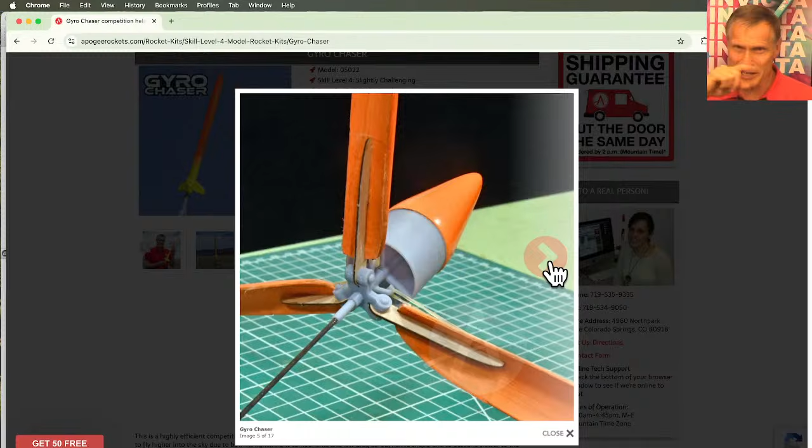Previously, this was laser cut, and it was pretty good. But the laser cutting, you know, you had separate hinge pins and everything had to be glued just perfect. This, there's just like 3 drops of glue on the pins to hold them in, and a drop of glue on the shaft right here where it meets this piece, and then once inside the nose cone. And it's all self-aligning. And yeah, it just goes together so fast.

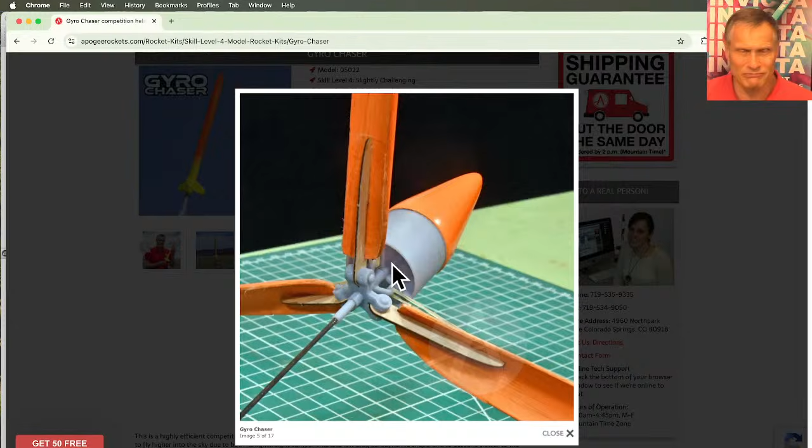And the rest of the rocket, you know, is great. And the blades, they curl up and they go inside the tube. And when it comes out, it just springs open. So I like this rocket because of the engineering involved. Well, I had to redesign this hub. It took me a while to get it right. And I just like, it's so simple. It's just so simple once you got it done.

Yeah, so that's kind of what it looks like. So this was released this week, I think it was, with the new hub. And there's the new hub and the pins that go with it. And it's all 3D printed. So the cool thing is, you know, we made the kit better, but we didn't have to increase the price at all. We were able to keep it the same price, which I was really happy about.

It still has some laser cut parts, but they're just the few parts. You know, you got your blades and your fins, and these are the hinge arms. And the hinge arms, they need to be strong because it takes a lot of force. So we kept them as plywood. But everything else, pretty easy peasy.

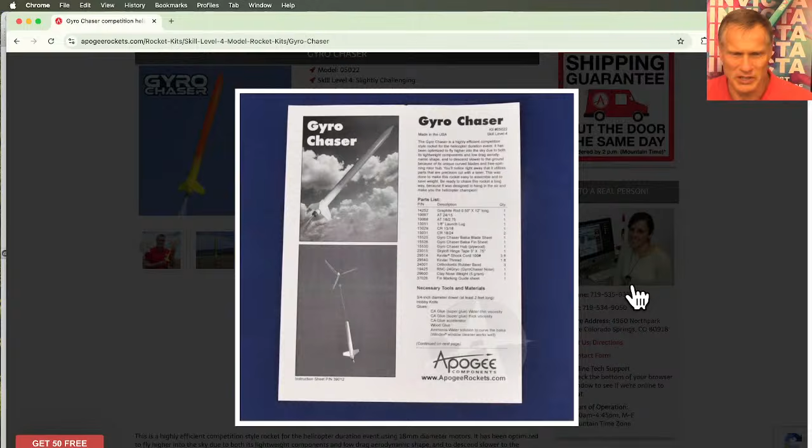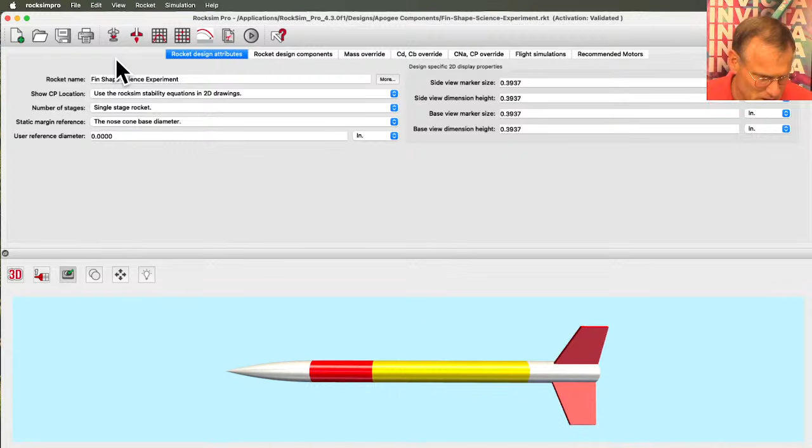Sturko3 says, on high-power rocket launch, say the Katana, do you favor the speed off the rail or a 5-to-1 thrust ratio, which RockSim gives both? Okay, so what he is talking about, this is a RockSim question. So let's open up the, what did he say, the Katana? Katana. Okay, so let's go file, open, and let's see if we've got a Katana here.

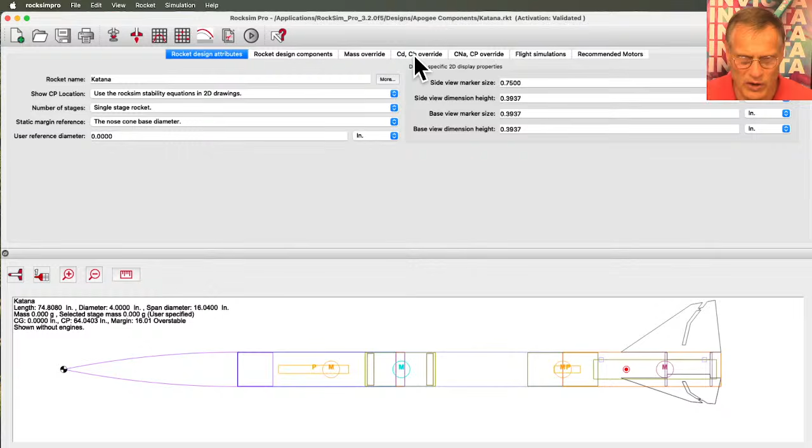Katana rocket. Okay, so here's the Katana. Oh, okay, so I'm noticing right now that the center of gravity is way up here. That kind of tells me something's weird. So that's the mass override. So it tells me that if I see the center of gravity up here, I always want to go to my mass override tab. And this is checked, so we're going to uncheck it. And now it moves back to where it should be.

Okay, so let's load a motor in this and run a simple simulation. Show only engines that match the motor mount diameter. I want to do a low thrust motor. Let's try Cesaroni. Let's see if there's something a little bit smaller. I want a J, Aerotech J135. And let's make it a 14-second delay. I always choose the longest delay to get started.

And let's see where we're launching from. Okay, so this is dual deployment. I assume this is the drogue because that's a pretty big chute. So we'll deploy this one at apogee and then this one at an altitude, and we'll say the altitude is 500 feet. Starting state. Oh, we've got to make this an 8-foot long launch rod. Oops. And it's launching straight up.

Launch conditions. We're at a pretty low altitude. I'm not sure where this is. We'll find out here in just a second. Okay, so it ran the simulation. So his question is about liftoff speed off the rail or a 5-to-1 thrust ratio.

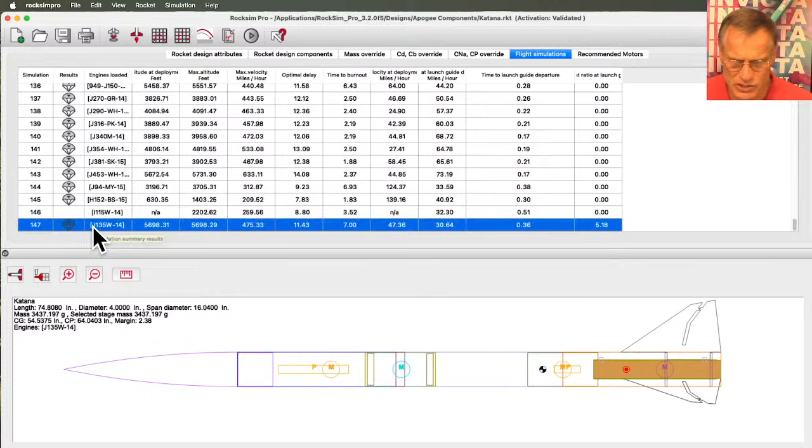And the other thing that he mentions is the thrust to weight ratio. Right now it's not showing that, but if you right click on the column header and then come down here to organize columns, you can find the thrust to weight ratio at launch guide departure. So we'll click OK and then find that last one that we just did. Yeah, so this one right here. This is the thrust to weight ratio at launch guide departure.

Let me move this column right there. To move columns around, you just click and drag the column header. I just wanted both of them right next to each other. So this is the one that we're comparing. So his question is, which one do I prefer? Velocity at launch guide departure or thrust to weight ratio?

Personally, I like to look at this one right here, and this is my preference. I know there's a lot of RSOs out there that look at the thrust to weight ratio, but the thrust to weight ratio that they look at is not at launch guide departure. They just look at the maximum thrust to weight ratio, which may or may not occur when the rocket leaves the rail. I like to know what the speed is when the rocket's leaving the rail, because it can be deceiving.

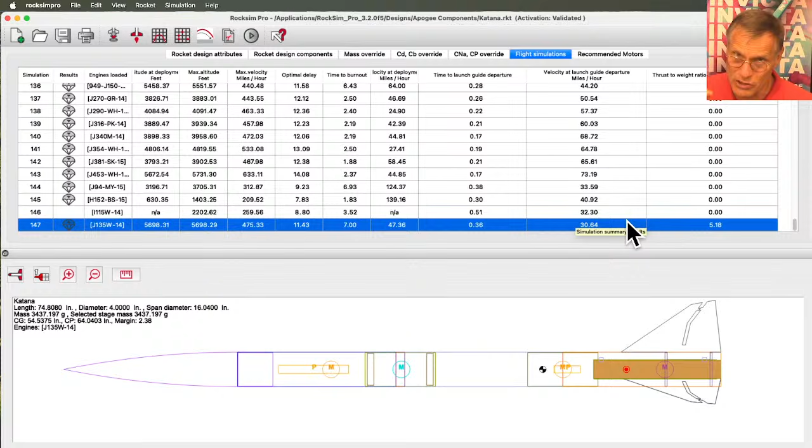And that's why we choose to display the thrust to weight ratio at launch guide departure, because once it leaves the pad, that is typically the slowest that the rocket is that's unguided. And so I like to use this number, but I know a lot of people like to use this, but this number is important when it leaves the pad.

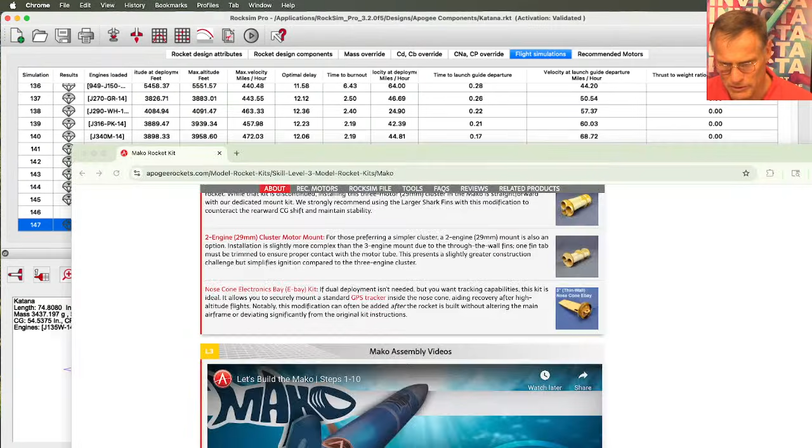Gino 145 says, standard dual deploy or head end, advantages and disadvantages in RockSim, just the parts where they go. Okay, so head end dual deployment, like this Mako.

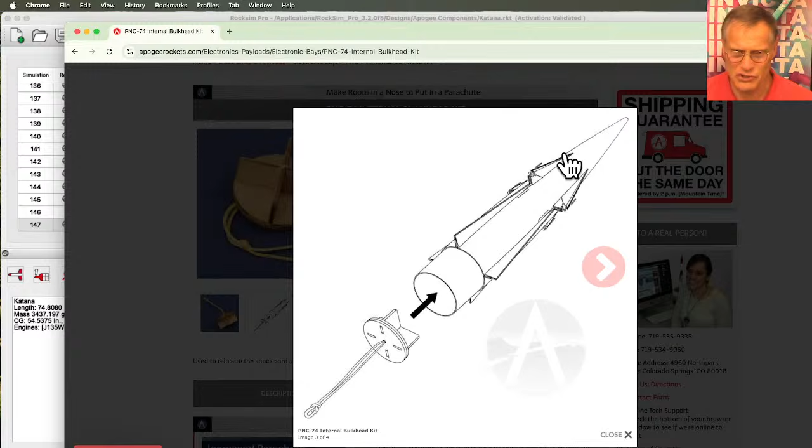Okay, so we created this shock cord anchor. It goes inside a 3-inch nose cone. Let me click on it and see if I got a picture of it. Here's a sketch of a 3-inch nose cone. This is actually the Nike Hercules, and we use this bulkhead inside the Nike Hercules because it's positioned way up here at the front. And what that allows you to do is to put a parachute inside the back end of the nose cone. And that is typically how head end dual deployment works.

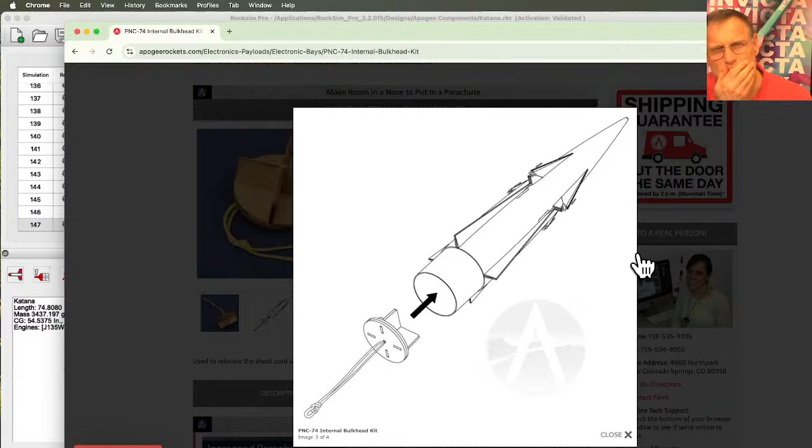What was it that I was doing where I was doing head end dual deployment? Let's see if I got an article about it. How to and guides. We want to go to Peak of Flight newsletter, all newsletters. Maybe I did a video. Head end. Nope, that's not what I wanted. I wanted to do a find on this page. Head end.

And I don't see it on that page, so maybe it was a video. Advanced construction videos, all videos. Do a find. Head end. Okay, head-end dual deployment. What is it and how can you use it? So let me click on this video. And I don't want to play the video. So this is video number 437.

So if you go to how-to and guides, advanced construction videos, and then you go to all videos, you click over here, and it takes you to this page right here. And then you want to scroll down. You see the numbers right here. Scroll down to 437. And then when you click on that, it'll take you to the video.

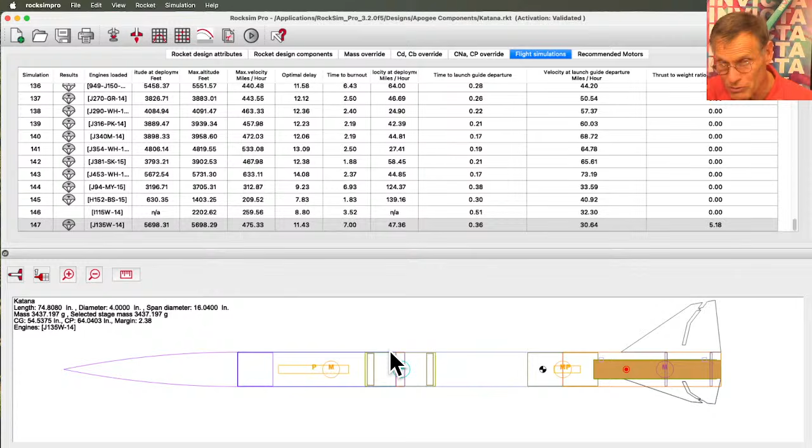If your rocket's long, like the Mako, see on this rocket right here, we can put the eBay right here, but we have the typical shoulder up here. This tube right here is not long enough. Typically the shoulder is 1 body tube diameter. So on the Mako, the body tube diameter is 3 inches, so the shoulder there is 3 inches, and the shoulder on the eBay is typically also roughly 1 body tube diameter, because that keeps it from rattling back and forth. It's long enough that it keeps it concentric.

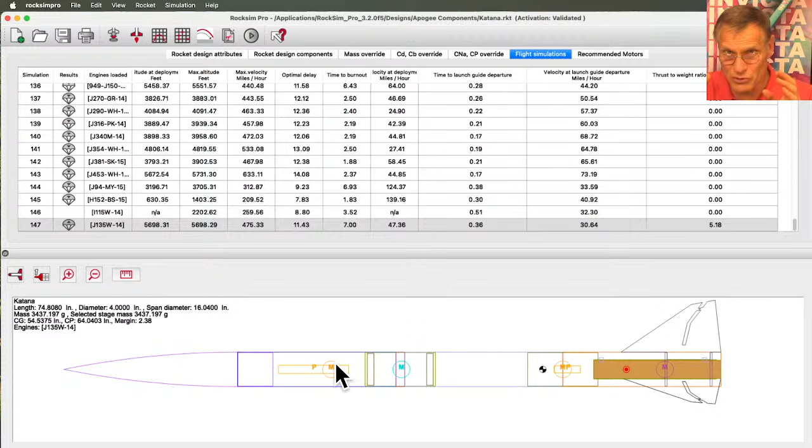But the tube there is I think like a 6 or 7 inch tube, so there's not room enough for a parachute. So if you cut the back end of the nose cone off, you can just shove that parachute up in there, and you know, that's an easy modification.

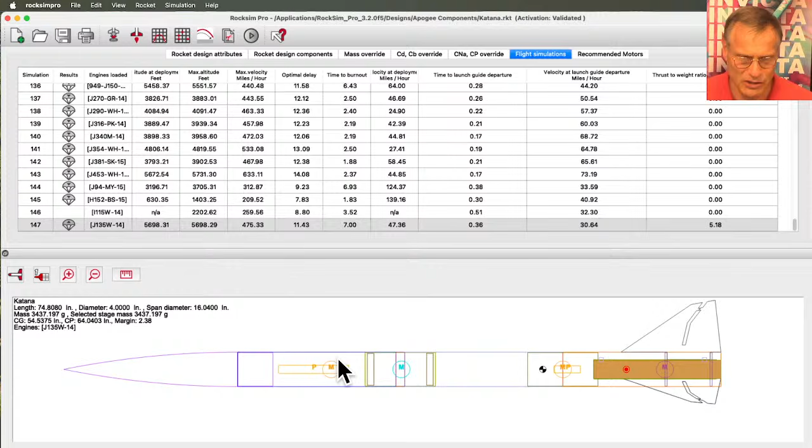So in RockSim, how do you do this? Let me take this kit right here. Okay, so we're going to go to the rocket design components. So here's our 48-inch parachute, and I'm going to move it to a new location. I'm going to put it inside the nose cone.

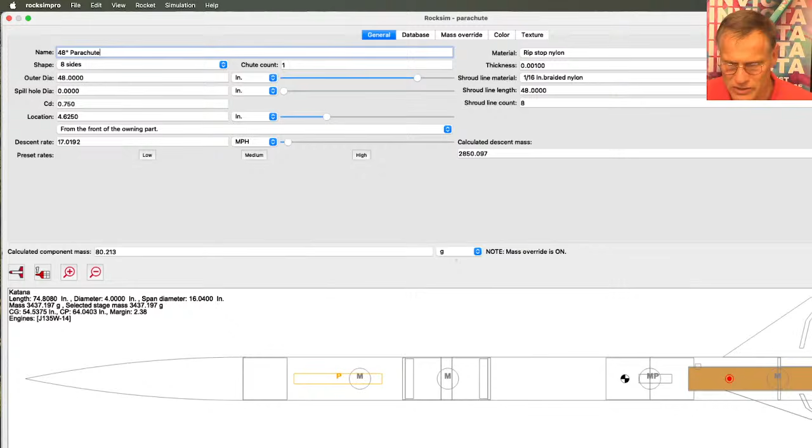So actually, crap, I'm going to have to delete it and add it back because I want to get rid of this tube right there. So I'm going to delete that whole tube, and when I get rid of the tube, it's also going to get rid of everything on the inside. So really delete this component, and I'm going to say yes. So now I got a short rocket.

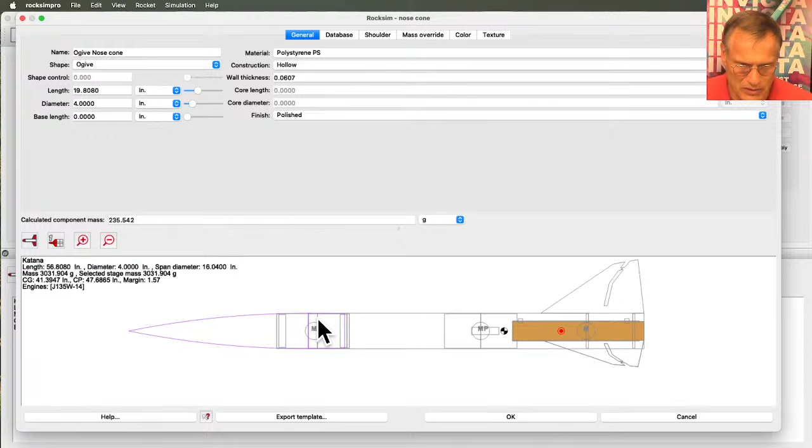And there's my eBay. It moved forward. The problem is it's not quite forward enough. So I'm going to first go to my nose cone here, and it's not a good color where you can see it. So let's make this color darker.

Make it reddish. And you still can't see it. But what I wanted to show you was the shoulder right back here. We're going to cut that off, and we're going to use the coupler on the eBay as the shoulder. So I'm going to go to my shoulder settings and clear the shoulder values. And when I did that, it went away. So now we just have the ogive side of the nose cone, and it stops right there. And the shoulder fits inside.

Let me go back to the nose cone here, and let me make it 3D. And let me go to the color, and I'm going to go to the opacity, and I'm going to turn down the opacity. So now we can see inside that nose cone. And this blue part right here is the shoulder on the eBay.

So now I'm going to go to that eBay. That's the wrong tube coupler. That's the wrong one. Where is it? eBay coupler. There it is. I'm going to open that. Let me change the color. It was blue. I'm going to turn it to red because all of our couplers are red except for the 4-inch one, which is brown. I'll leave it that. Okay, so I changed it to red.

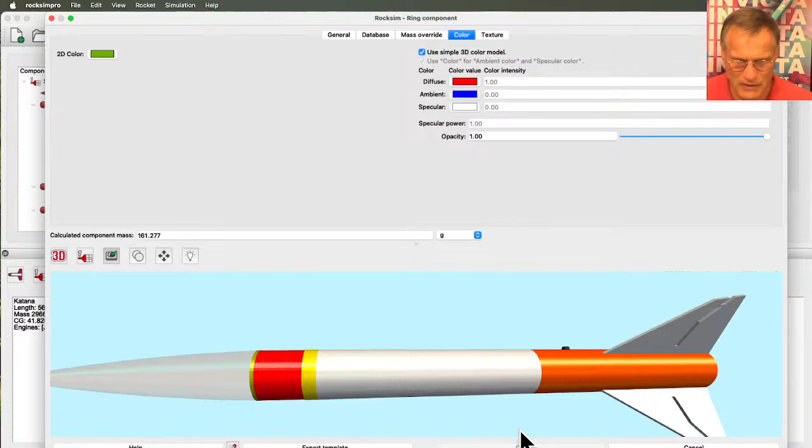This is a switch band, so this tube right there, let's make it shorter. So it's no longer going to be an 18-inch. Let's make it a 9-inch tube. And so now we got to change the name to a 9-inch tube. And let's make also this one translucent. Okay, so now we can see inside the rocket. You can see I'm switching back and forth between 3D and 2D.

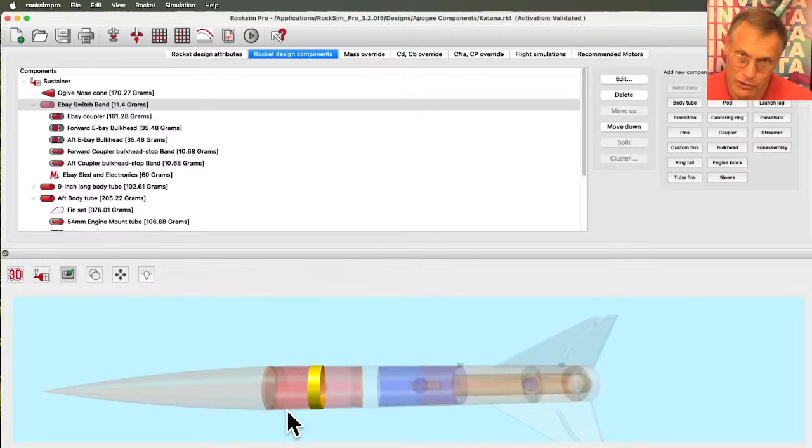Okay, so I made the nose cone transparent. I made this short body tube, which is right here, also transparent. This is another tube coupler. So I've got a switch band, I've got the coupler here, and then the base of the nose cone. And you can see they just line up. So the coupler is now the shoulder of the nose cone. It kind of does dual purpose there. Okay, so now let me go back to 2D.

So we have one parachute back here, this orange, let's see, can I get right there? That's the small parachute. And let me open it up and say it's an 18-inch drogue parachute. 18-inch drogue parachute. And the color is orange. Aren't you glad I didn't say red? So now this mass object right here is the eBay sled and the electronics.

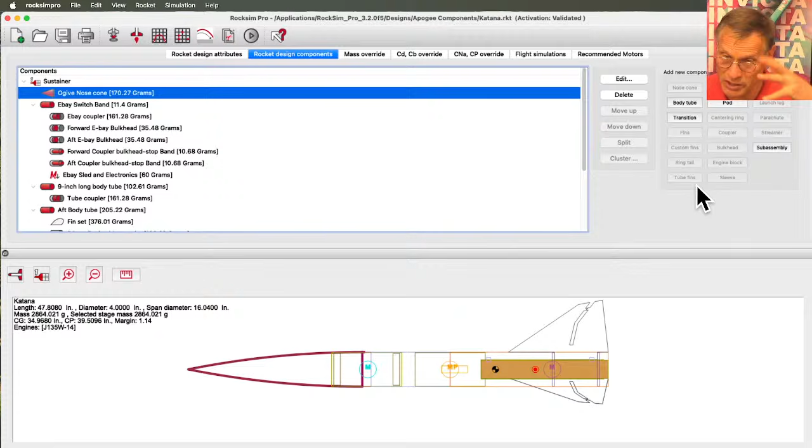So now I need a parachute up in the nose cone. So, oops. So if you click on the nose cone, you'll see that I can't add a parachute there. So this is the trick that you're going to have to do here. The next component down is the switch band. And normally you wouldn't put a parachute in there, but I'm going to put a parachute in there because it will let me. So my parachute button is right here, so I'm going to click on that. And this time I want that 48-inch nylon parachute. And you can see it added it right there.

Let me go back to 2D. It's pretty big right there. If I make the thickness a little bit smaller, 0.9. Typically that makes it smaller. There we go. I didn't make it small enough. 0.3. Okay, so here's the parachute. And now I'm going to change the position of that parachute. I'm just going to slide it.

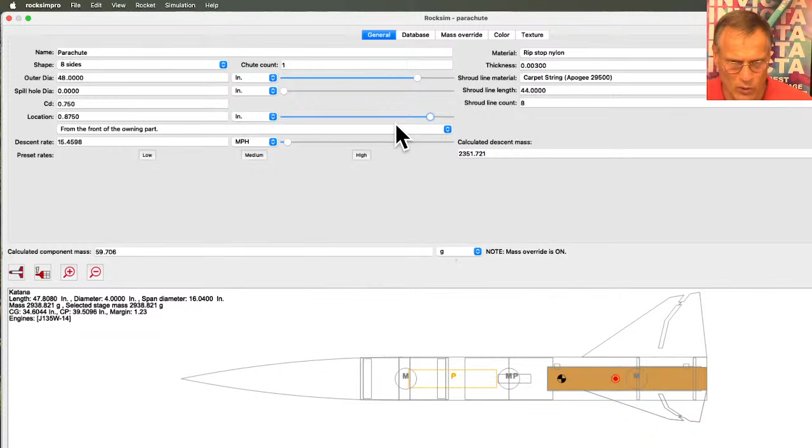See, it's only letting me slide it backwards because right now I'm putting it into this component right there where my cursor is. And it won't allow me to use the slider bar. But the other trick is I can put in any number right here in the location that I want. So let me put in a negative 10 inches and then hit the tab key and you'll see that it slid forward. And we're not quite forward enough. So let's make it minus 15 inches. And that's kind of too far, so maybe 14. Okay, so now we put the parachute up there.

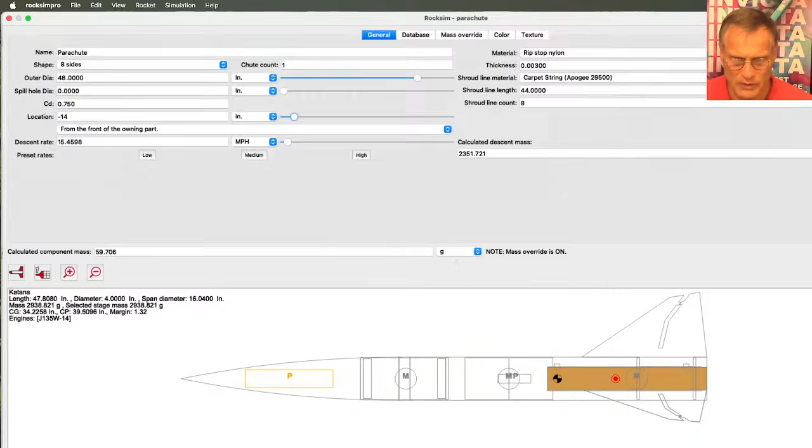We also need to put a shock cord in there. And a shock cord is a mass object. See, there's no button that says shock cord. So for a shock cord, you use a mass object. And you can put a mass object inside of a nose cone. So I don't have to do that same trick. So I'm going to cancel out of the database.

I'm going to call this a shock cord. And I'm going to change the classification to shock cord. And I select my material. I'm looking for tubular Kevlar. That will work. That's 3/8. That's a little skinny. Do I got a 1/2 inch? There we go. Oops.

1/2 inch tubular Kevlar. That will work. And then the length, typically when you put a shock cord in a rocket, this is dual deployment, you're going to have 2 lengths, a short one and a long one. You always want to do the long one for the parachute that opens first, because at that point the rocket's going to be moving fast. Once the small parachute is out, now the rocket's moving slow and you don't need a big long one, so you can use a short one. So I'm going to make this one 10 feet.

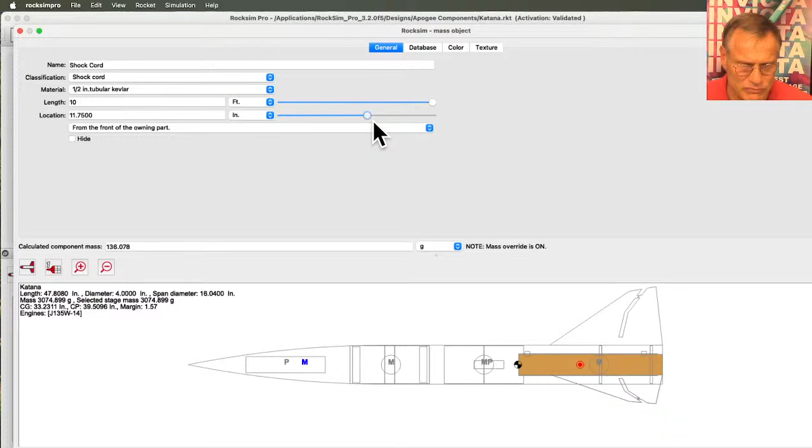And so right now it's putting it right there, and I'm going to move the location to here. So this is my bulkhead on the coupler, and then this is an inside tube that keeps that bulkhead from going inside. This is typical of the Apogee 4-inch diameter eBay kit. And I'll say okay. Okay, so basically now we have head-end dual deployment setup. We have a parachute up in the nose cone and a parachute in the back.

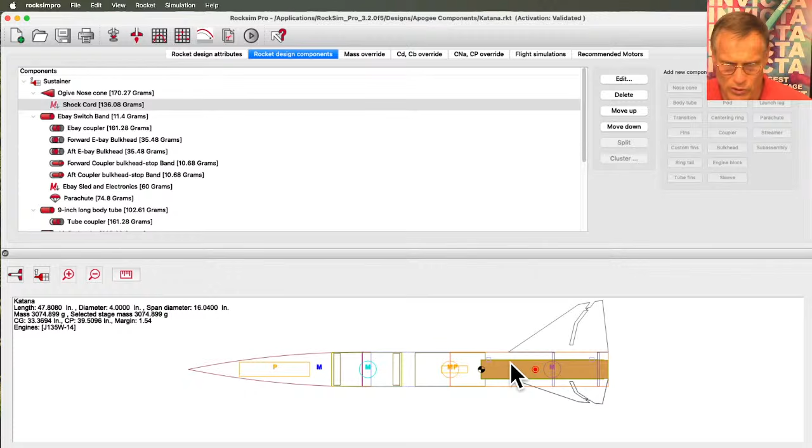My rocket is still stable. Here's my center of gravity. Here's the center of pressure, even with this big J motor installed. And there looks to be enough room in front of the engine for the parachute. And then here is the back of the eBay. So now it's just a matter of doing dual deployment.

So flight events, again, we have our 18-inch drogue parachute set at Apogee, and then this one was a 48-inch, and we're going to set that one to an altitude of 500 feet. And starting state, still 96 inches. Everything stays the same. We've got wind coming from the west at 8 miles an hour. And I'll hit the flight profile, and we'll just take a look at this launch.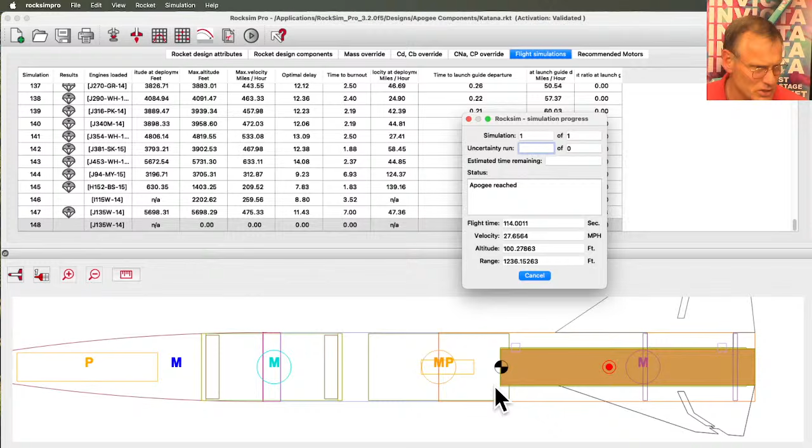Okay. So remember, I left my rocket being translucent, so you're seeing all the stuff on the inside here. So it's kind of weird. Where am I launching from? I have no idea where I am. This right here is a compass, so I'm going to swing it around so that the black arrow points up. And I'm just trying to figure out what part of the... Okay, so here's Chicago. So it looks like I'm somewhere in Iowa.

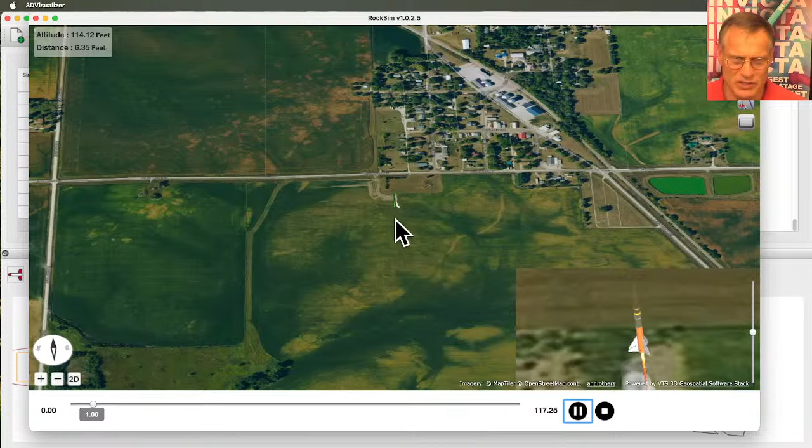And when you lose your launch pad, just click the home button, it'll take you right back to where we were. I zoomed in too close though. I want to see a trajectory view. Swing the north around again. Okay, so my rocket is right there at the tip of my arrow. And when we launch it, you can see the rocket taking off. It's going high. I need to zoom out.

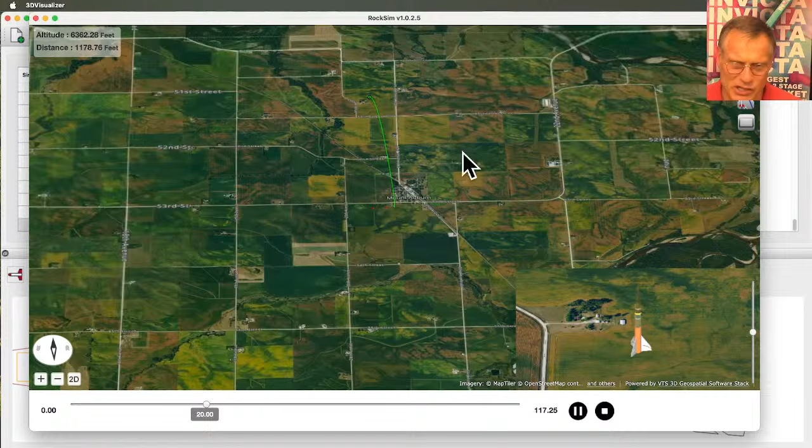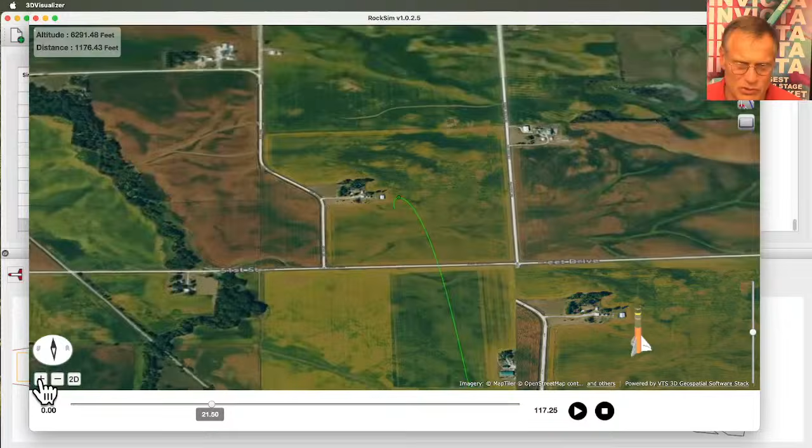We're at 4,000 feet, 4,500, 5,000 feet. We're slowing down. We're going to probably make 6,000 feet. 63. It's getting really close to Apogee. There's Apogee. So at Apogee, the parachute came out. So let's stop it right there and zoom in. Find the rocket, clicking that button right there. Zoom in, zoom in, zoom in. Okay, so there is our small drogue parachute.

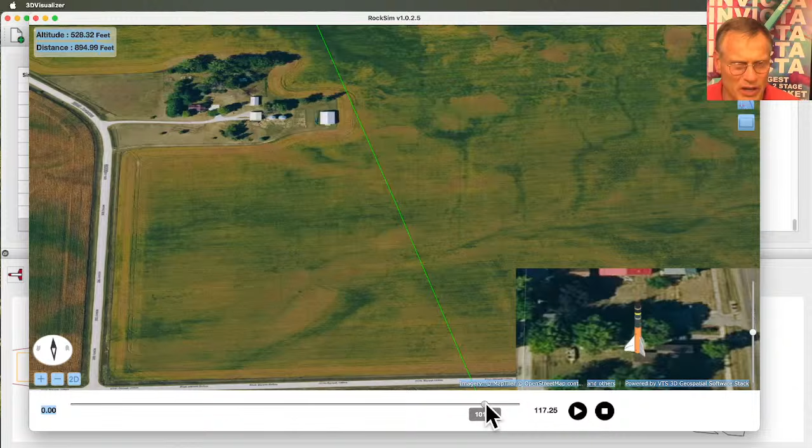And then when it gets down to 500 feet, the parachute should change. Oops. Find the rocket. I'm just going to move things along to where we get close to 500 feet. So I'm looking up in the top left corner to my altitude. Okay, so here's 528. Find the rocket. Okay, so there's the rocket.

And if we go one step further, 499, and oops, I lost the rocket again. And now we have a bigger parachute. So right here is when the big parachute came out. I can tell that because the trajectory line changed. So that is the question on head-end dual deployment.

We have Dr. Disco says, may have missed this somewhere, so excuse me if this has been discussed previously. Is there a way to account for a spill hole in a parachute? Okay, so that's a good question. So let's go back to our rocket design components, and let's find that big parachute. So to find it, you highlight it here, and then it will get selected up here. We can open it. And I'm going to change the name to the 48-inch parachute so I know the difference.

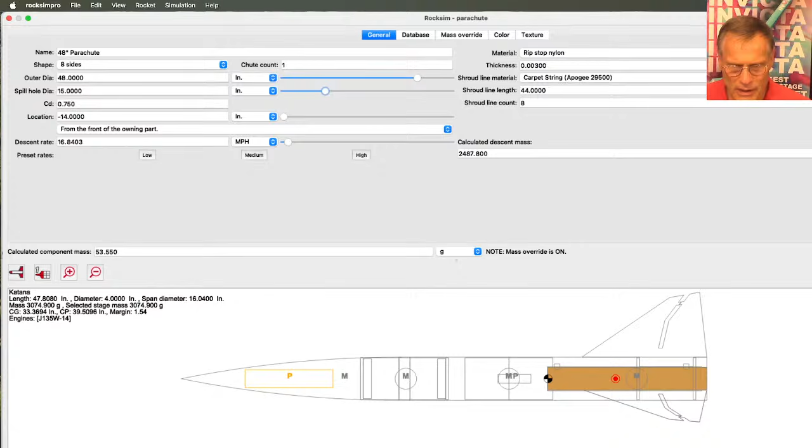So here in RockSim, if you go down 2 rows, you have a spill hole diameter. So let's put in a 15-inch spill hole, and then hit the tab key. And so now the parachute has a spill hole in it. And we click OK. And let's run another simulation. Same thing, we're going to be still launching from Iowa.

We have 2 different flights here. So this is the last one we ran, and this is the new one. And I want to compare these, so you select both of them, and then come up here to the launch visualizer button. Oh, it always does that when I go up into that corner.

Okay, so there's the rocket on the pad. I'm going to launch it, and there's actually 2 rockets here. They follow identical paths. So now they're starting to deviate, and they're not deviating too much. So why are they deviating?

The reason is when you cut a spill hole in it, the weight has changed. And so this one right here is probably the one with the spill hole. But right now, these are the drogue parachutes. We didn't cut a spill hole in the drogue, just the main parachute. So until we get down to 500 feet, we're not going to see much difference. And they seem to be falling pretty close.

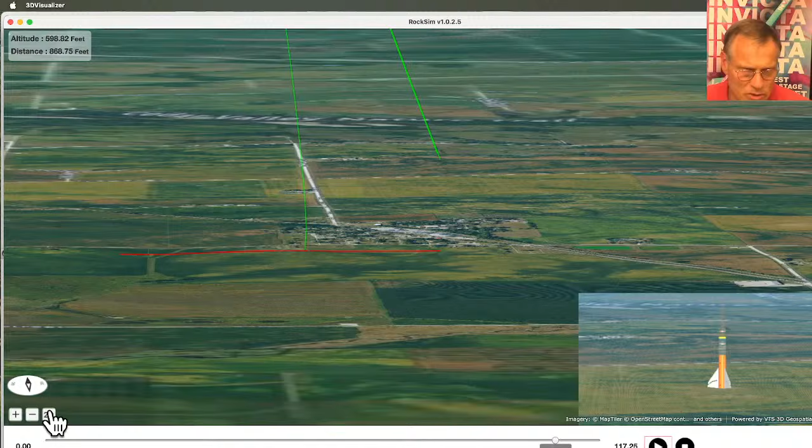Okay, so now you'll see that, let's see if I can rotate this around. And let me zoom out, see if we can see a difference. Okay, so now we can see the dog leg. And if we back it up, oh, come on. And I want to zoom in. I still want to see the rockets. Okay, so there's the rockets coming down.

So we think that this one right here is the one with the spill hole. So once the main parachute opens up, this one's going to fall faster because it does have that spill hole in it. So does it overtake it and actually land first? It's really hard to see. I can't tell. Yeah, I think that's the one with the spill hole. Because it did come down a little bit faster, it landed a little bit shorter.

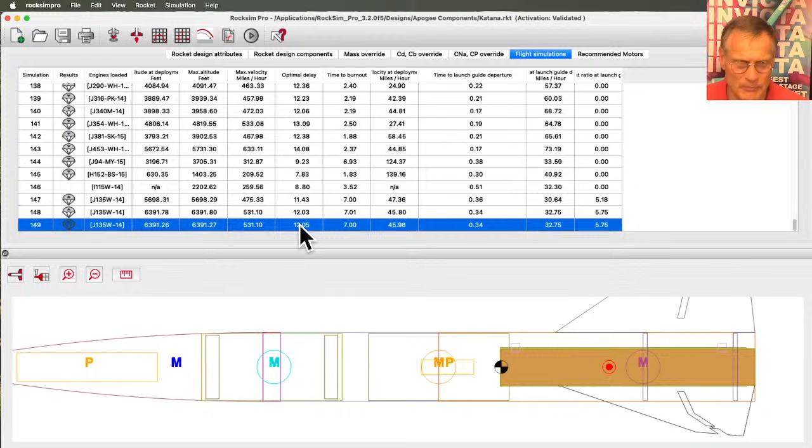Let's see if we can find the velocity at touchdown. So I double clicked on the row, and what I'm looking for is recovery system data. Okay, so here is the velocity at landing, and in the Y direction, which is the coming down side, is at 15.52 miles per hour.

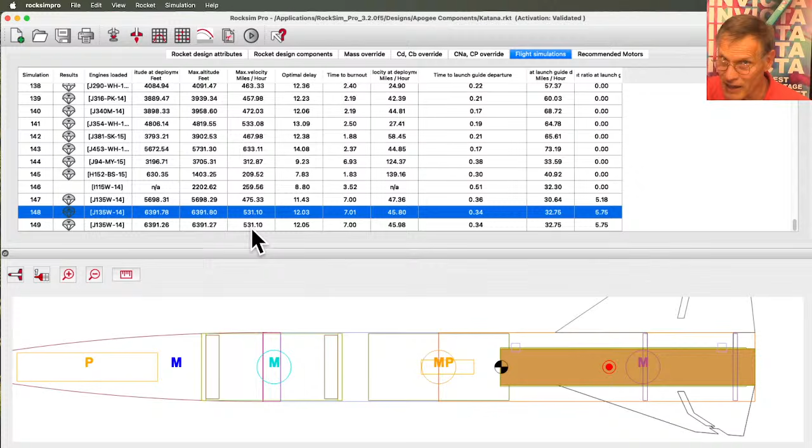If I go to this one, it was at 14.97 miles per hour. So that one is slower because it's a lower descent speed. So that tells me that the bottom one had that spill hole, and it did land at a higher speed because of that spill hole in there. Pretty good question.

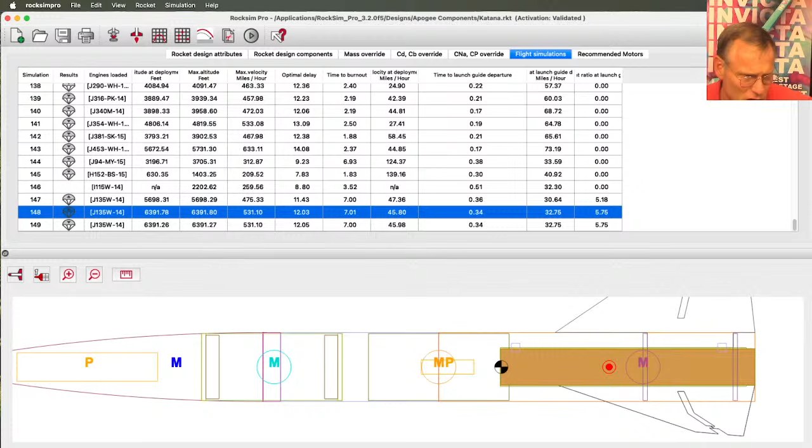Okay, Goldspot 804 says, I'm trying to run a simulation on the tuner rocket that's in the free plans book, but it doesn't allow me to choose a recommended engine. Is it because it is a two-stage or something else? And the answer is yes. It's because it's a two-stage. Let me open, I don't think I have that one in here, but let me find a different rocket that's a two-stage. I'm just trying to remember which one's two-stage.

How come I'm not seeing all my rockets? Blue Streak, Rotary Revolution, Slow-Mo, Texas Twister, Apprentice, Frit. Is the Frit a two-stage rocket? Save my changes to that? No. No, the Frit is not a two-stage rocket. Initial Katana, Maker's Dungeon, Midge, Mini Condor, Peregrine, Research, Express, Spek. Okay, here's a two-stage rocket.

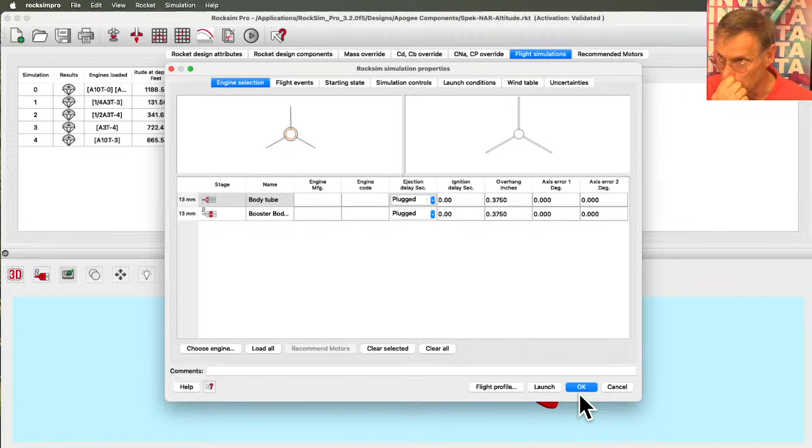So normally, to find the recommended motors, you just click up here, go prepare for launch, and the button right here is recommended motors, but you see it's grayed out. I can't select the motors for this. So what do you do? That's your question, right? How do you pick motors? You got to do it in two stages. You got to pick the motor for the booster stage by itself, and then pick the motor for the upper stage by itself. So how do you do that?

Okay, so we're going to go to the rocket design attributes. Right now it says 2-stage, and we need to switch that to 1-stage. But when we switch it to 1-stage, it's going to delete all the parts in the booster stage. So I need to take all those parts in the booster stage and move them to the upper stage. So we're going to go to the Rocket Design components, select the booster tube right there, and copy it. I right click, copy, then come up to the last component here and hit paste.

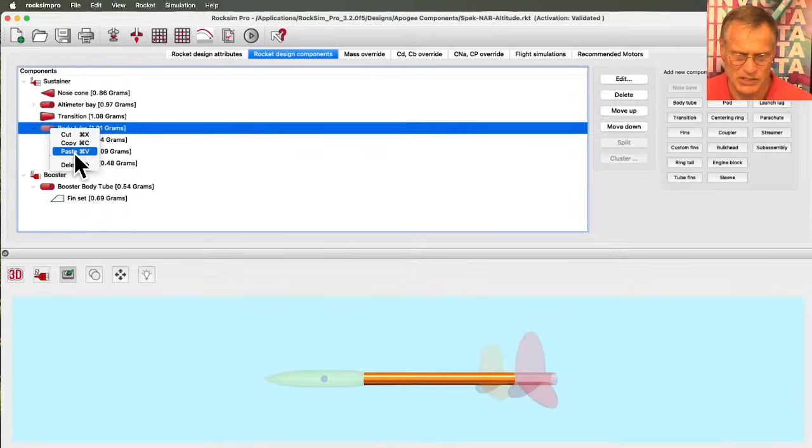So again, right click, then paste, and you'll notice that it put another booster stage right here in the middle. But this booster stage is actually connected to the top stage. And this one down here is the other booster stage. So now I can come back over here to the Rocket Design attributes and change this to a single stage rocket. It's going to ask, do I want to do this? I'm going to say yes. So even though it looks like a 2-stage rocket, it's going to behave like a single stage rocket because all the components are in the upper stage.

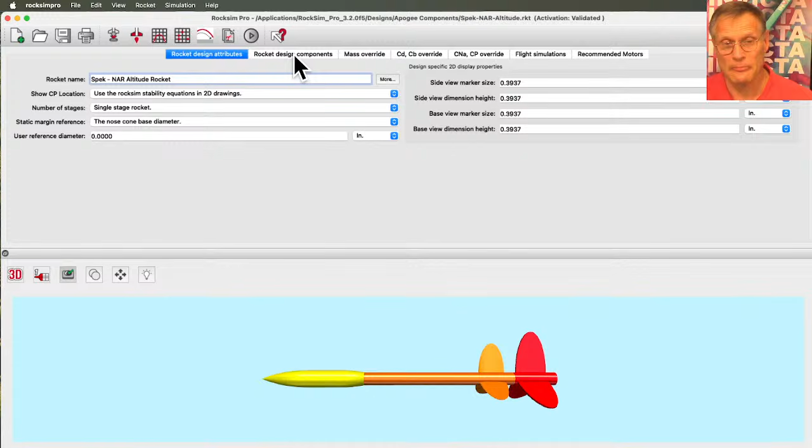Now to fly this and to determine what motors, first we need to have a motor in the upper stage because that motor has weight and we're lifting it at the same time.

So we need to know what the weight of a typical motor is. And I would suggest using the heaviest motor that you realistically are going to put in there. So if we go to prepare for flight, it's showing 2 motors right here, 2 motor tubes. And this is the bottom one, this is the top one.

And if I double click here, I'm going to put in the biggest motor out of this list, and I can tell that this is the biggest motor. Well, the A3, I don't know which weighs the most, but this one has the most impulse. So I'll select that one and click OK. Actually, okay, so what I wanted to know was the mass of that motor.

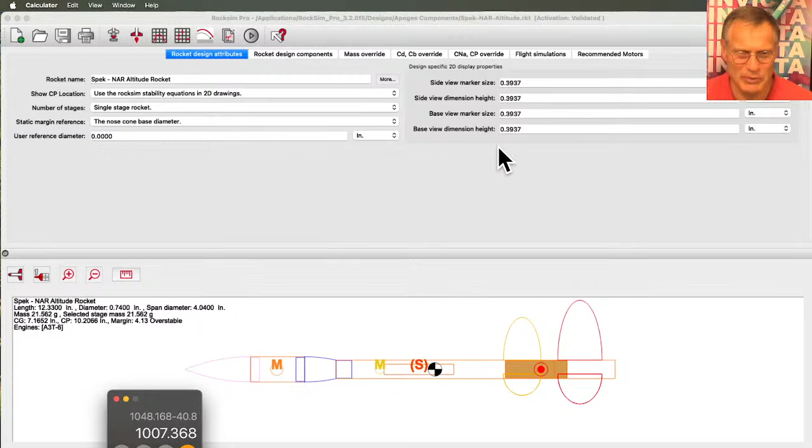So the mass right now, I'm going to get a calculator here. Where's my calculator? Calculator app. Not the calendar app, I want the calculator app. CALC, calculator app. Okay, so I'm going to take this number right here, 21.562.

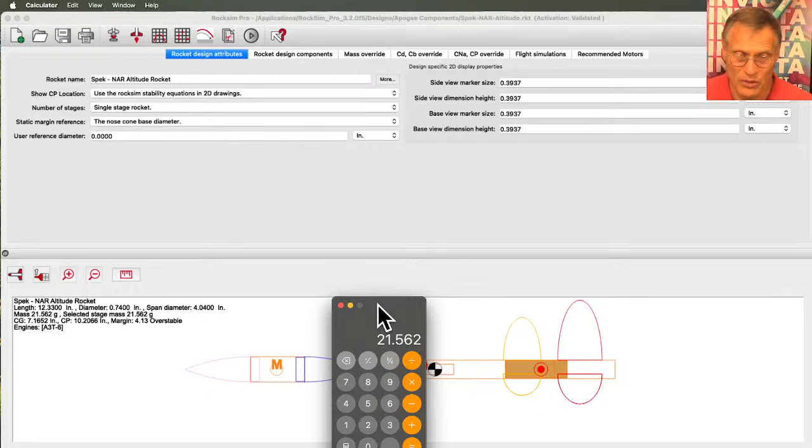21.562. Basically, I'm just trying to find out the weight of the motor. So I got the weight of the whole rocket with the motor, and then I'm going to take the motor out, and the difference should be the new weight. Let's see, can we see this on the screen? I'm trying to move this over to get the calculator over here. Okay, so now I got this.

I'm going to go back up here to the motor, and I'm going to clear all. Click OK. And now my mass is 13.062. So now I'm going to subtract 13.062 equals. So this is 8.5 grams is the mass of that motor.

So I need to put 8.5 grams back here, and the easiest way to do that is to use a mass object. So I'm going to select that body tube, come up here to mass object, and I'm going to call this the fake motor. Why won't it let me click up here? That's weird. Won't let me click anywhere. Oh, it's looking in the database. Cancel out of that. Now I can do this.

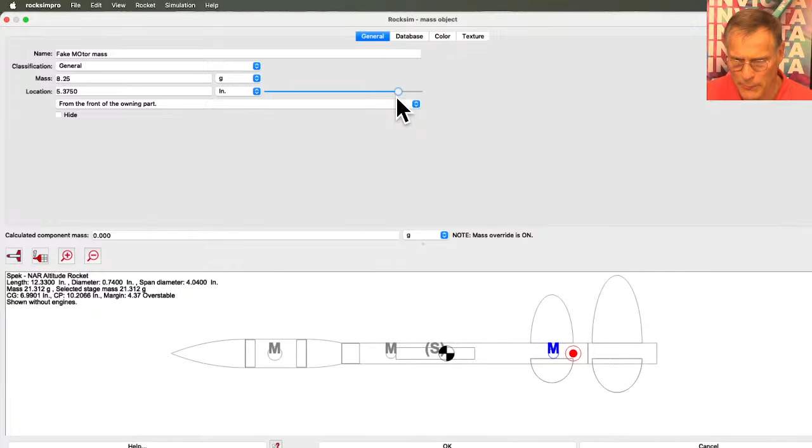Fake motor mass. And I know the mass is 8.5 grams. And right now I put it right there. We need to move it back here. Approximately right there. Okay, so that accounts for the weight of that motor. Okay, so now we can run a simulation and we can find the recommended motors.

So then you come back up here and, oh, the other thing that we needed to do is to turn this one off. You can't have more than one motor mount. So you got to uncheck that. So basically I take that tube and I say it's no longer a motor mount, and click OK. And now, hopefully, there it is. Now the recommended motor shows up.

And now I just click on that, say use the recommended conditions, and when it's done, it comes over here to the recommended motors tab, and it shows me the 4 motors that it ran. 3 of them are recommended. But this is a single stage rocket. So as a single stage rocket, this one right here, the A3, is going to get me the highest altitude.

So what I want to do, you can only do this in RockSim Pro. Everything I did up to this point you can do in RockSim and in RockSim Pro. But now when I'm in RockSim Pro, which is up here, I have some options. And one of the options is, now I want to figure out how high this rocket's going to go approximately when I'm selecting the motor for the upper stage.

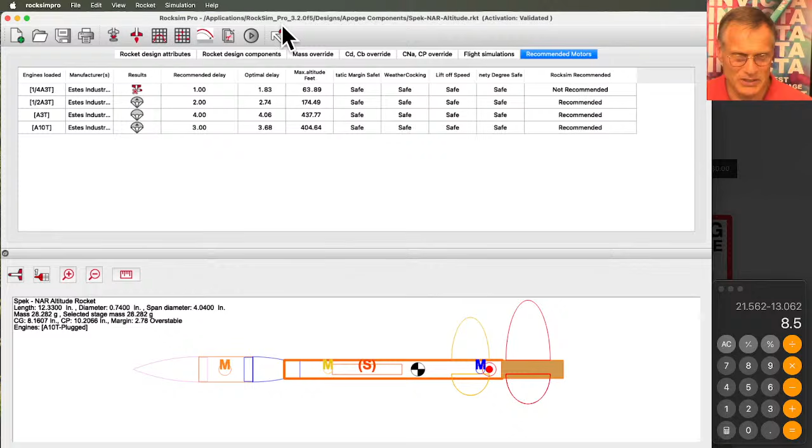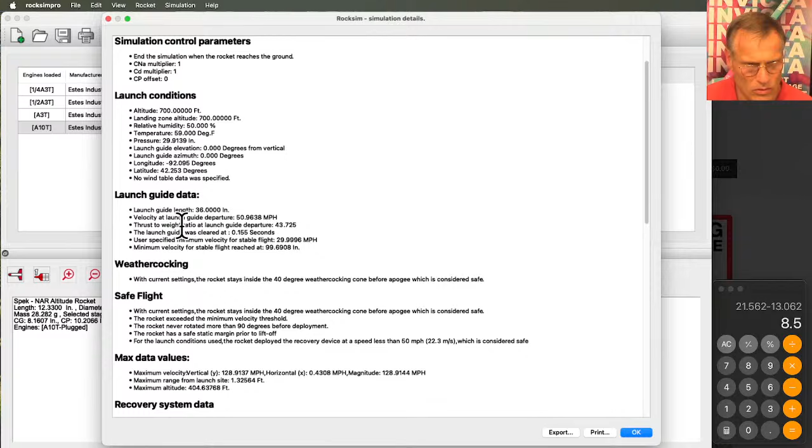So I need to make a screenshot. Let me see here. See if this has the information that I'm looking at. What I'm looking for is altitude at burnout. Let's see. I don't have an altitude at burnout, but I can get it.

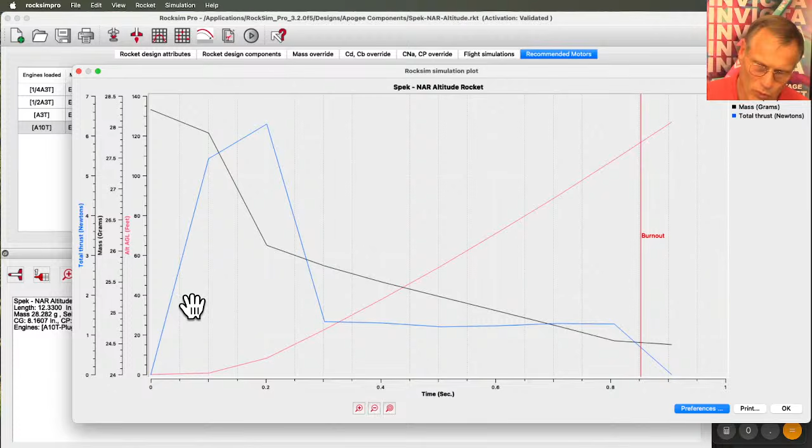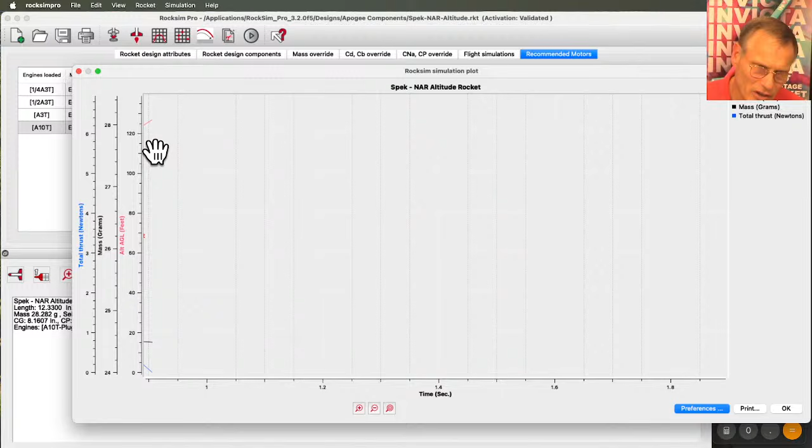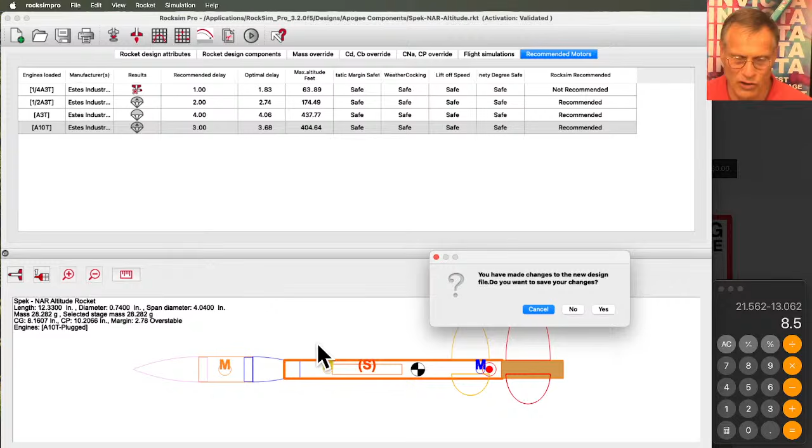Okay, so now I need to go back to my original rocket. I'm opening the Nike Hercules just to clear this out. I don't want to save my changes, so I say no. Now I'm going to go back to my rocket, it was the Spek. Click open. I don't want to change that. Okay, so here's the rocket again.

So this time I am going to delete the bottom stage. I'm going to go here to number of stages and take it to a single stage. Click yes. Now it's deleted all the components in the bottom stage.

Now I can run a new simulation. This time I don't have to add a mass because we're going to use the actual mass of the motor. So I'm going to go choose an engine. Actually, I wanted to go to recommended motors. Use my recommended, okay, I'm going to use my values.

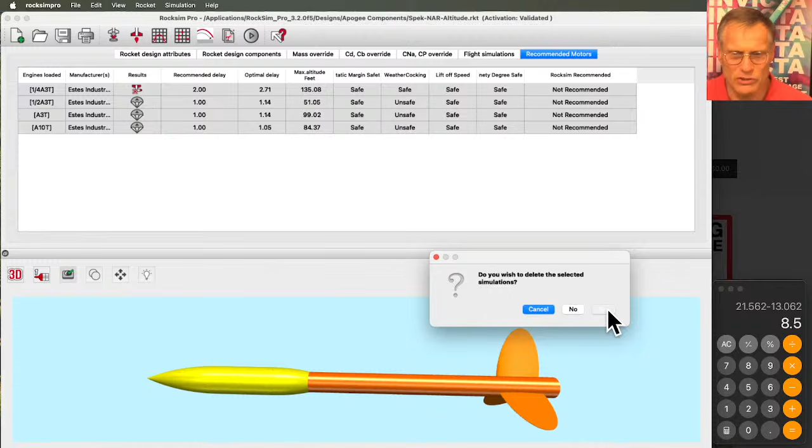Oops, ignore that, I screwed that up. So I'm going to delete all these. Delete those, yes. I need to reset my new conditions.

So my new conditions is the starting state. And we said the starting altitude was, what did we say? It was 445 or 440? No, 140 feet, 145. So I'm going to add 145 to 227. So over here on my calculator, 227 plus 145 equals 372. So my launch altitude is now 372.

And I forgot the speed of the rocket as it took off. If I knew what the speed was when it burned out, I would put that velocity here. I don't know, I'm going to say 120, 100 miles an hour, I'm just guessing. So it has a speed when it stages, and it has an altitude before the upper stage comes off.

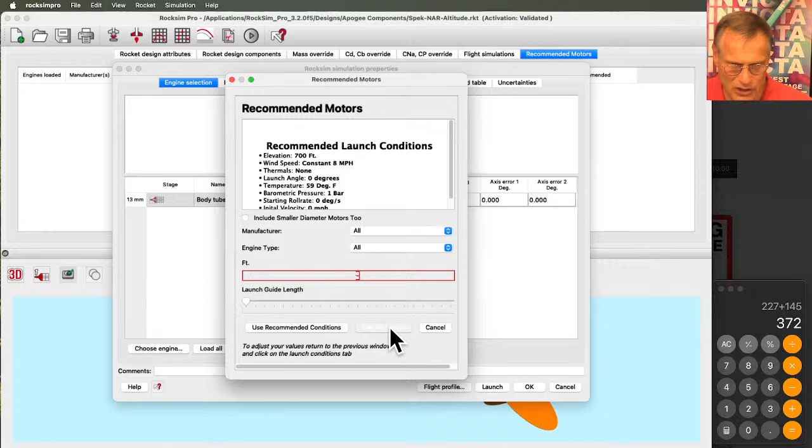And now I go back to engine selection, use recommend motors, use my values, so it uses my starting velocity, which I think worked, and it didn't find any that worked. Why did it not?

Let's go back here. Under flight events, deploy at maximum ejection delay. Let's try that again. Recommend motors, use my values. Okay, so now we did get some that are recommended. It didn't like the A10 for some reason, probably because the delay is too short. These are marginal, but they worked.

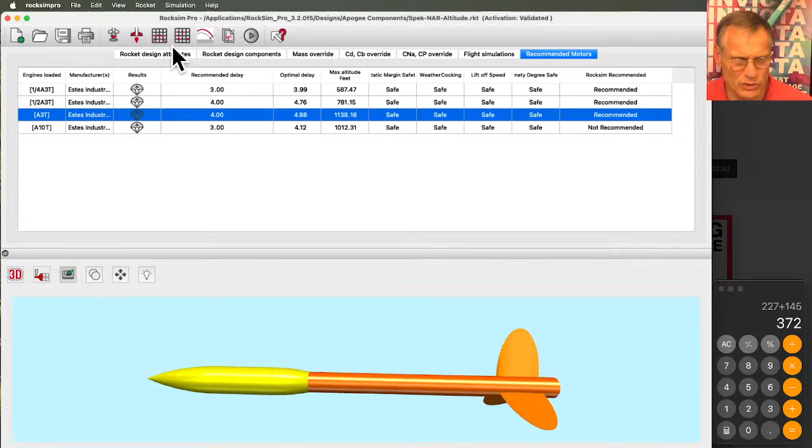So let's highlight that row and do a right click, and let's say load engines. And so it loaded the engine. So I'm going to go back here to prepare for launch. See, it loaded that A3-4. I bet I can get a 6. A 6.

Starting state, still 100 miles an hour. Under launch conditions, we're still like 145 feet-ish above. And let's do the flight profile just to see what this rocket looks like.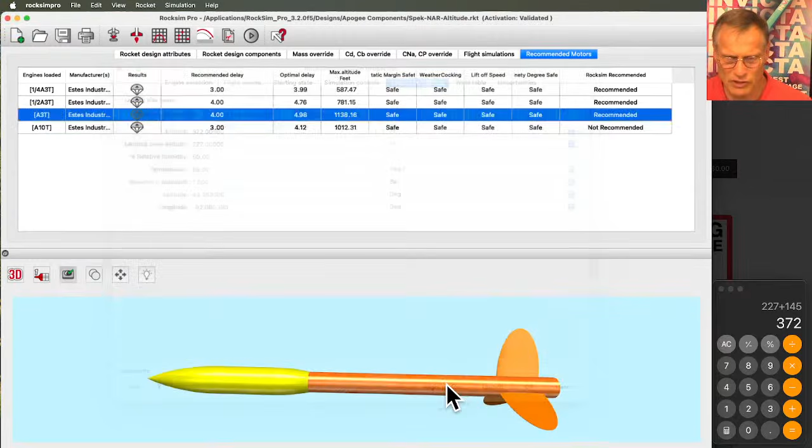Okay, so there's my rocket sitting on the pad. I can't see it, there it is. Zoom out. And actually, the rocket is in the air 145 feet, you can see it's up in the air. And it already has some velocity when it takes off. And when we launch it, you can see it's moving really fast, that's because it had initial velocity. And I'm just speeding it up so it comes down. And I want to look at the flight profile. If I keep zooming out, you'll see, it started in the air.

And that long process was how to pick motors for a two-stage rocket. I actually wrote an article on this if you want to see it.

Go to How-To and Guides, Peak of Flight newsletter, all newsletters, and let's type in, do a find, let's type in two-stage. I gotta type it right. It says twice.

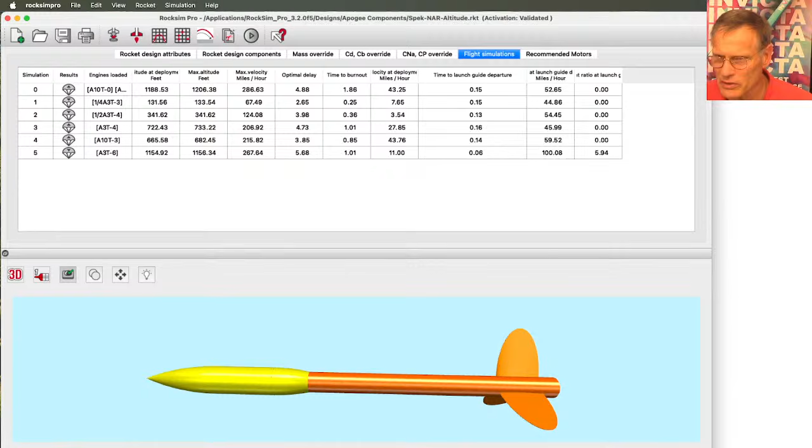So first I'm going to download the RockSim file. So I just went on the page, downloaded it. Okay, so Big Red Max, downloaded this, the file I downloaded. I'm going to say save my changes, no. Okay, so right now this has a single motor mount in it.

So we're going to change this to a 3-engine cluster. The question is, I don't think I'm going to get 3 29s, but I can get 3 24s in there. So first I got to change that 29 millimeter engine mount to a 24 body tube. So this is the engine mount. Somebody should call it an engine mount.

And I want to go to the database, choose from the database, and I want to find a 24 millimeter tube. Go back to the general. Okay, so it is a 24 millimeter tube now. Click OK. So now we got a 24 millimeter tube. So here's what you're going to do.

You're going to select the motor mount, come over here to this button here that says cluster. Click on cluster, and it's going to bring up the cluster wizard, and click OK. Now we can select what the configuration is for this engine mount. So here you see a 3-engine cluster, and that would work.

However, I would recommend not choosing that because the motor tubes are touching each other and you won't be able to get your screw-on engine retainers. So they need to be separated a little bit. And to do that, instead of doing this one, click on this one and then hit the continue button. And now we're going to say the number of tubes in the cluster, instead of 2, we're going to make it 3. And it changed it to 3, but now I'm going to change the cluster radius.

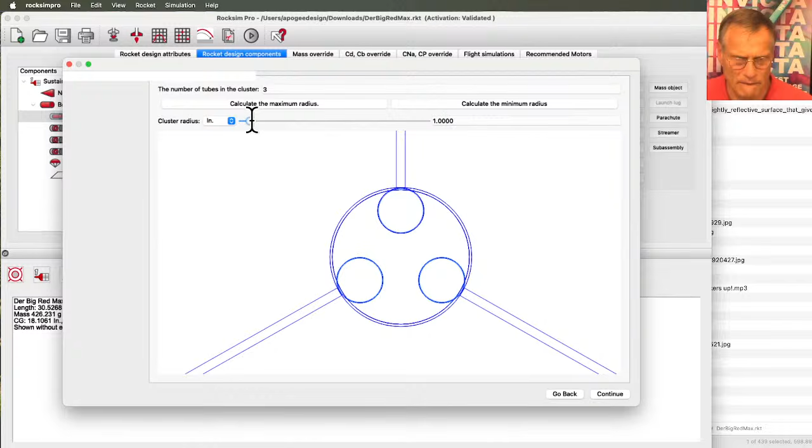You can see when I change that radius, it separates them. And by separating them, now I can put the screw-on engine retainer because it's bigger than a tube. And then hit continue. This screen allows you to rotate them. Doesn't really matter because it's pretty symmetrical. Hit continue. And then this one, it says, okay, I'm done. All right, so now we have 3 cluster tubes. We have 1, 2, 3.

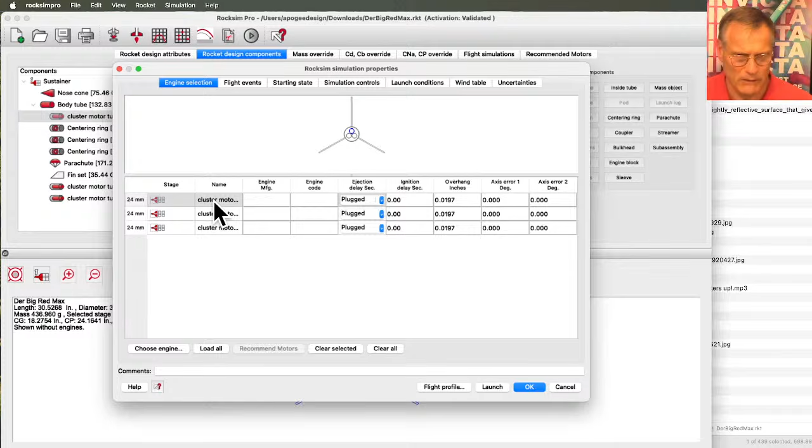And now we can run our simulations. So when you go to run the simulation, you have cluster motor number 1, 2, and 3. You can choose your engine. Let's say it's an Aerotech E20. Let's go 7-second delay. Engine overhang, let's call it 1/4 of an inch. Click OK. So now we have 1 engine loaded. And to load the other ones, the easiest thing to do is just hit load all. And it loads all the motors in there.

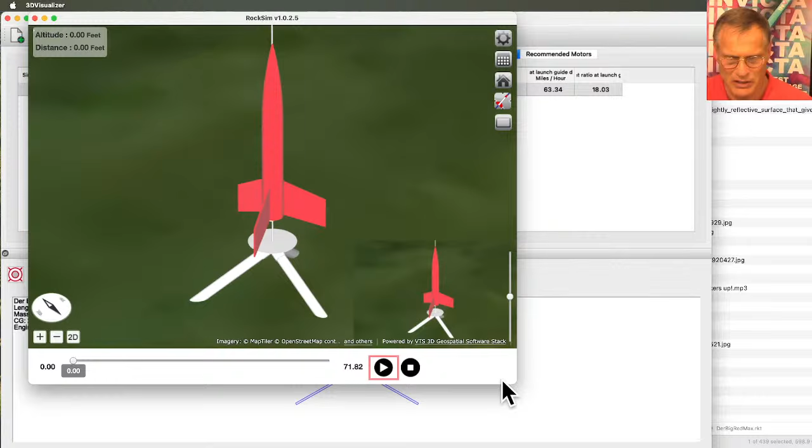Under flight events, deploy at maximum ejection. Starting state, I'm going to make it back down to that. Launch conditions, I want to change this back to 227. And then hit flight profile, and it will run the simulation. And I can get my maximum altitude here of 1,883 feet. And if I do this, we can see the rocket sitting on the pad.

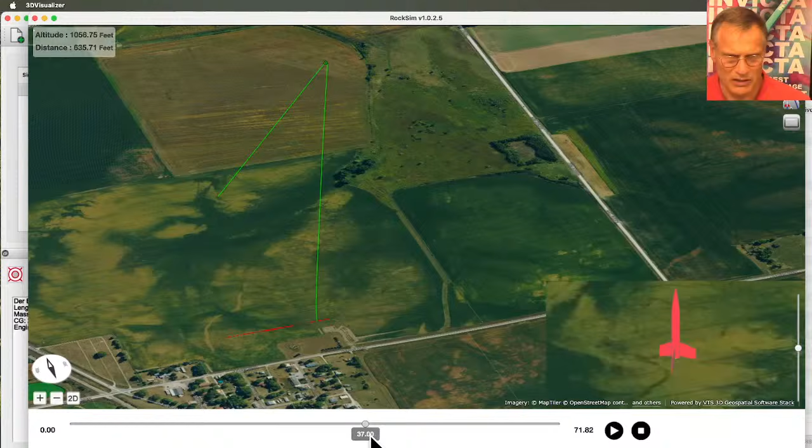Let's go to a trajectory view. Gets the rocket right there. We launch it. The rocket's taking off. It looks like it's going mostly straight. Yeah, it's a pretty good flight. I like that. Okay, there's the parachute ejected, and the rocket's coming down. And then it lands over here. Everything seems to be landing in this cemetery. This is a magnet for rockets.

And again, here's the 3 engines that you can see: E20-7, E20W-7, E20-27. So that was pretty quick. It's not hard. You just hit that cluster button right there in the middle, and it kind of walks you through it. Gold Spot says, awesome, thank you. I'm having such a time getting motors that RockSim said were safe.

Yeah. Geno 145, even though yours is a 4-inch Red Max, this is a 3-inch, the process is identical. You start with the RockSim file, find the motor tube, and then click the cluster button, and it'll work. I just chose it because I don't have a 4-inch diameter Red Max RockSim file to start with. So I knew I had a 3-inch, so that's what I used.